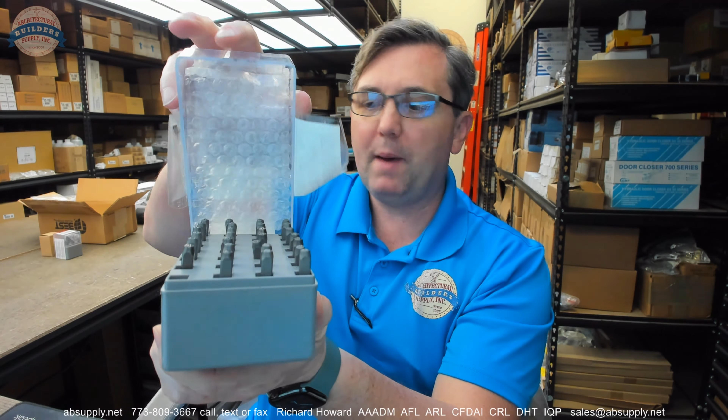This video is to bring you a closer look at the Best part number DD502. This is a set of 3/32 of an inch letter dies, basically the alphabet, in 3/32 of an inch size.

4 times 6 is 24, plus 3 is 27.

Yeah, we're a little long in the number, and I think it's because of this ampersand. I believe that's an ampersand. Yeah, you have to look at it in reverse, but that's an ampersand. So that's why we are coming up a little heavy in terms of the count of letters in the alphabet.

Now, when it comes to stamping keys or cylinders, you can get them in 1/8 of an inch or 3/32. The 3/32 is the right size in my estimation. That would be the size you're really going to want for doing this sort of work.

The only thing that I don't really care for is there is no indication. Well, that's not true. That's not true at all. Here's what I was about to say.

The indication is that there is stamping on the side of the stamp, so that when you are stamping, you can feel with the pad of your thumb what side is down. Even though I'd need the tip of my thumb to feel it, it's clearly smooth on the other sides, so that when you're pulling a stamp down, you can rotate it in your hand without looking and know the proper letter is faced down as you stamp.

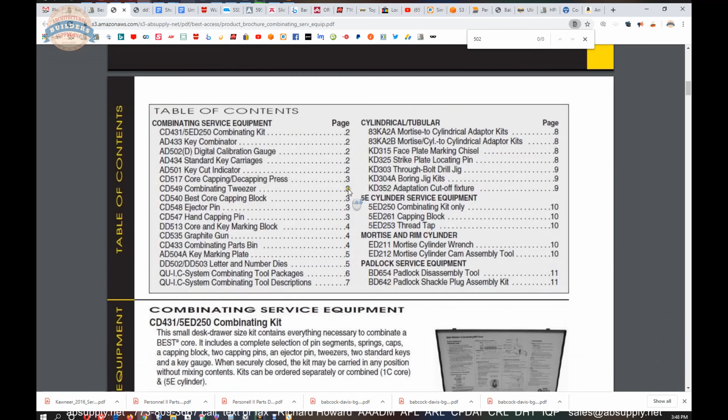DD502, so that didn't work. So we'll scroll through. Not a bad idea, because you'll see all of the service equipment. This client also bought a marking block, which is very handy as well.

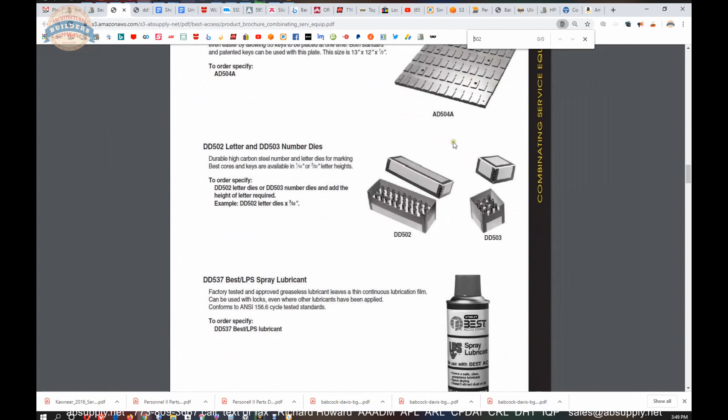Key marking plate. It's very handy to have all the keys laid out for you. Number and letter and number dies. They're here as we talked about earlier.

This catalog is very handy because it will allow you to review all of the service equipment as it pertains to supporting the substantial investment in a small format system from BEST.

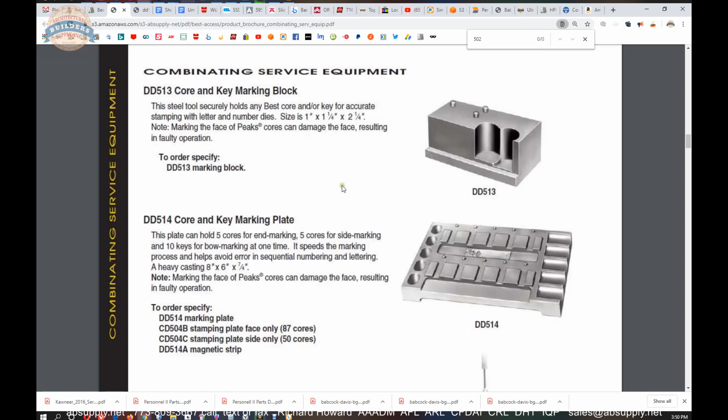That marking block is also very handy because it's going to hold on to the material you're working on. It's a good way to keep the material placed where you like it, because when you have to hold the die in your hand, at that point you're no longer securing what you're stamping. So these marking and stamping blocks are helpful in that regard.

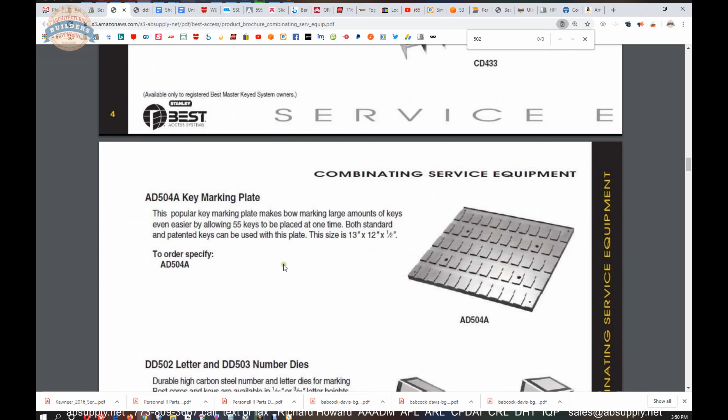A very common thing also is when they do engraving on machines. Kaba Ilco makes engraving machines. They always have a tray that your key blanks are fixtured into, and this is not unlike that. It allows you to accurately stamp your material.

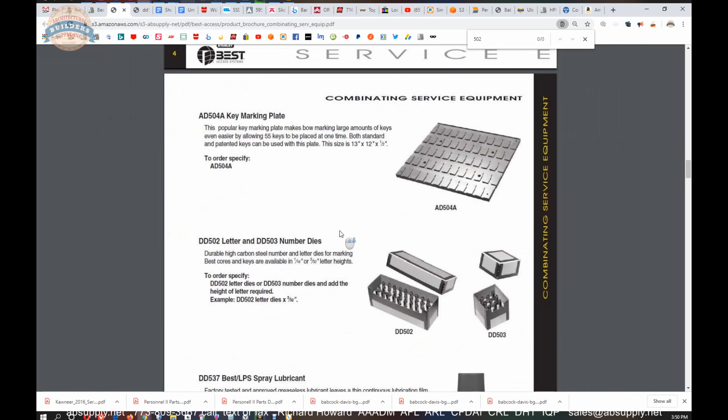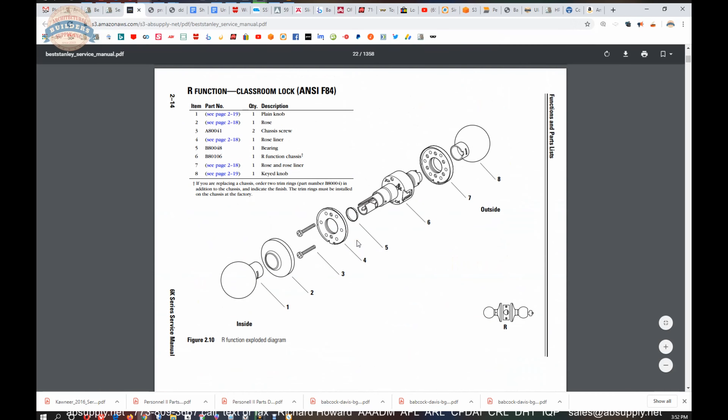Best Access Service Manual. This is an epic document that has parts breakdown of the entire line. When you call Best and ask them for the chassis from an R-function classroom lock in whatever series you're working on, in this case the 6K series, they're going to very politely ask if you've looked at the service manual. Not that they don't love your phone call, I'm sure they do. Every time I email support or call the factory, I get absolutely professional world-class support. But at the end of the day, they're just referring to the service manual, and it's right there.

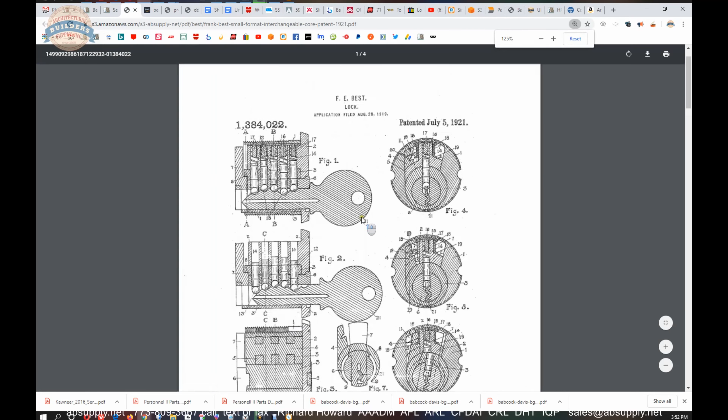Okay, other information is here as well. Fun fact, the Frank Best small format interchangeable core patent from 1921 is here. And while the small format core that we all know and love is a bit different than this 1921 patent, the principle of course is the same, where that cylinder can be removed. You'll note that they have balls here - those are ball bearings. This was a sign of the times, well before 1921 as well, where they inserted balls in the chambers because they were dealing with inferior material science when it comes to nickel silver, or the base material that key blanks and pin tumblers are made from. The ball bearings were used to substantially reduce the amount of friction on a key blank and the tumblers.

In Best, of course, this would be chamber 5 because it's tip to bow. Chamber 5 and chamber 4, because this is a 5-pin cylinder, would get 100% use, right? Where chamber 1 only sees one chamber hitting it at any one time. So right up in the front, you would certainly develop a lot more wear than you would otherwise.

But as you study this, you see that it's very interesting. You create a shear line for the cylinder plug itself when your key is fully inserted. But when you pull that key out one position, you then create a shear line at the cylinder pull position, where you have a shear line up at the control lug. And while that system has certainly changed, the underlying principle is the same as what's been done here with bottom pins - these balls are acting as the bottom pins in conjunction with a driver pin here. So that might be a 2, and that might be a 2, so that cut might be a 4. Then, of course, you have your driver pin and then your control pin.

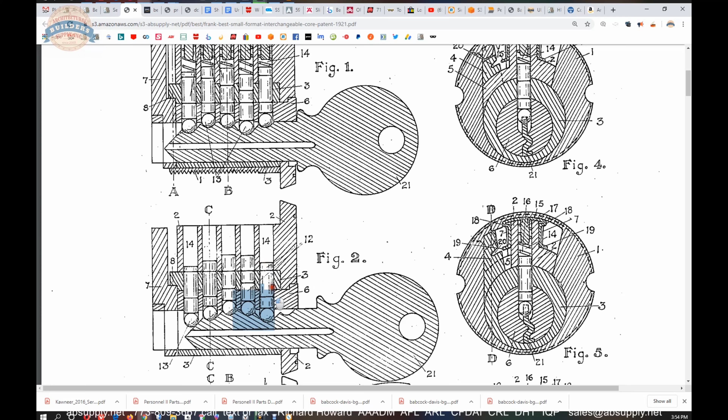Very interesting. And I'll tell you, Frank Best certainly - while he apparently is most definitely credited with the removable or interchangeable core principle - he's not credited with the ball bearing. P.F. Corbin was doing that at least a quarter century before that, and you can easily find documentation referring to it. It was quite a marketing effort on P.F. Corbin's behalf - they were saying they were the only company who offered ball bearings, very smooth, long-lasting construction, etc. Fascinating if you were to study the history of these absolute pioneers of genius when it comes to the development of cylinders that 100 years later we are using every single day, whether it be Frank Best or Walter Schlage or countless other people, like the New York City detective - I forget his first name, Segal, who came up with the Segal lock, etc.

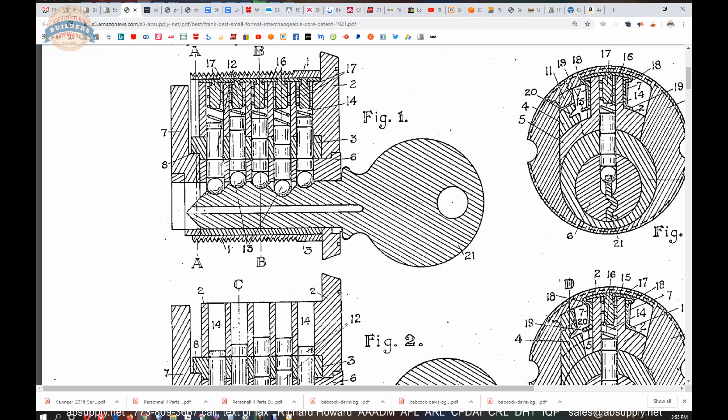Let's wrap up this video on camera.

Now, in conclusion, this is a die set - the factory die set. While the case has probably certainly changed over the years, I would imagine that this plastic case with this cover is going to be considered more durable than otherwise. 3/32 of an inch, that's the right size. I've had 1/8 of an inch, but the 3/32 is a better size - it looks more proportional with the size of actually what you're stamping.

Be mindful if you're stamping interchangeable small format cores, be real careful where you're stamping that material. You don't want to stamp it on the outer cylinder plug housing itself, the curved shape of the figure 8. You'll crush that in, and it's obviously not a flat surface so you wouldn't stamp there anyway, but don't attempt to, because it will damage the cylinder.

I'm very partial when it comes to Best, and it's not that we do a ton of business distributing Best, because we really don't. I'm partial because when we do, and we do, their technical support is really great. They are people who behave as if they're a partner in the process, and that's really what it takes. You're going to invest heavily into a key system - you've got to have world-class support behind it, and Best delivers that on every interaction that I have with them.